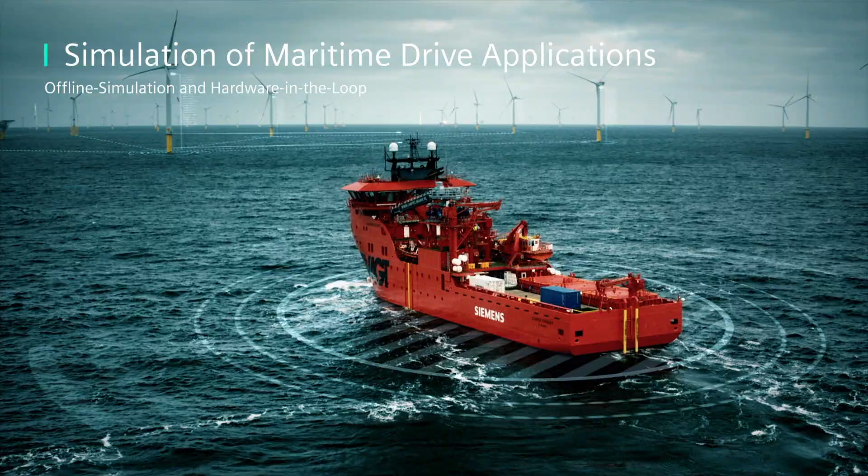What is the course of the maritime industry? The disruptive trend of green shipping is offering tremendous opportunities for electrification of the maritime drivetrain. On the other hand, this promising trend is leading to an increase of system complexity and more demanding technical requirements. THD levels in weak grids are just one of the various examples to be mentioned. On top, there are general project topics like cost pressure and tough timelines. For OEMs and system integrators, handling this increasing complexity will be a key factor for maintaining their business success.

A game changer for doing so is simulation. I wanted to introduce you to the offerings of Siemens Motion Control for simulation and virtual commissioning of complex drive systems, as addition to our comprehensive product portfolio.

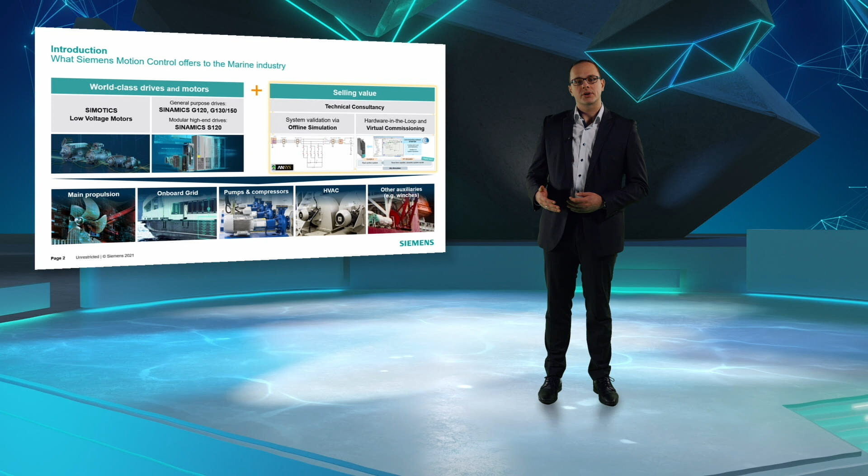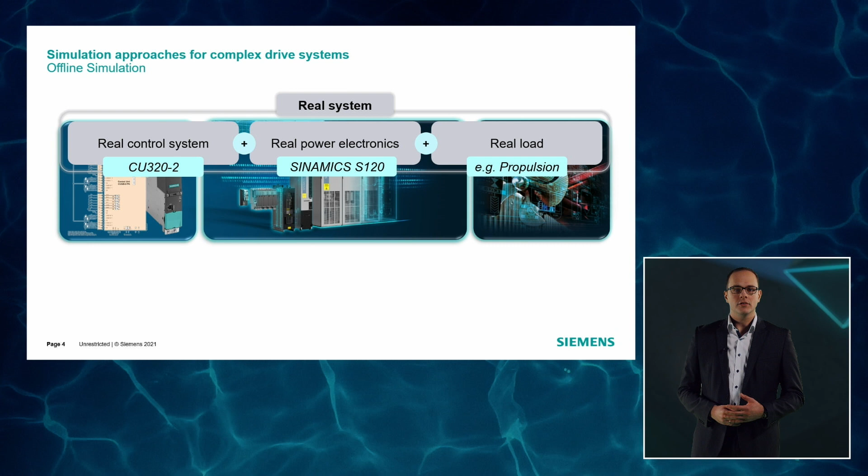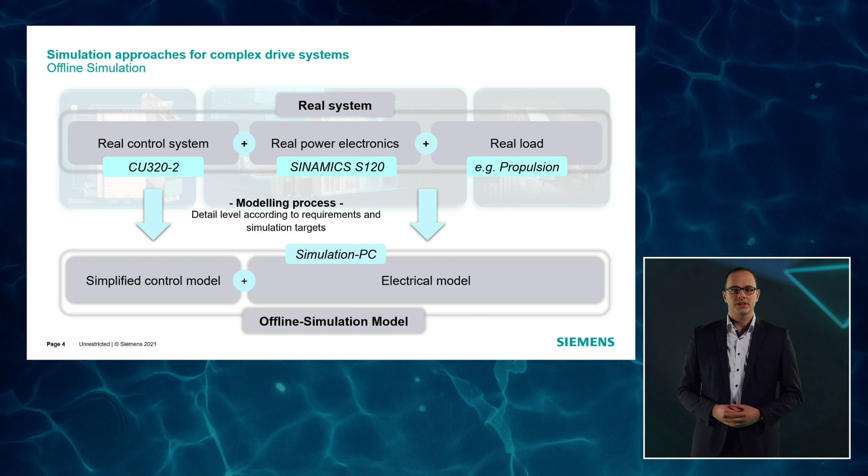Let's go on board. The core of any simulation approach is the comprehensive understanding of the real drive system. Generally, we divide this into the control system, the power electronics, and the load, for example, the electromechanical propulsion system. For offline simulation, the real system will be converted into a simplified control and an electrical model. The detail level of this process will be chosen according to project requirements and the simulation target.

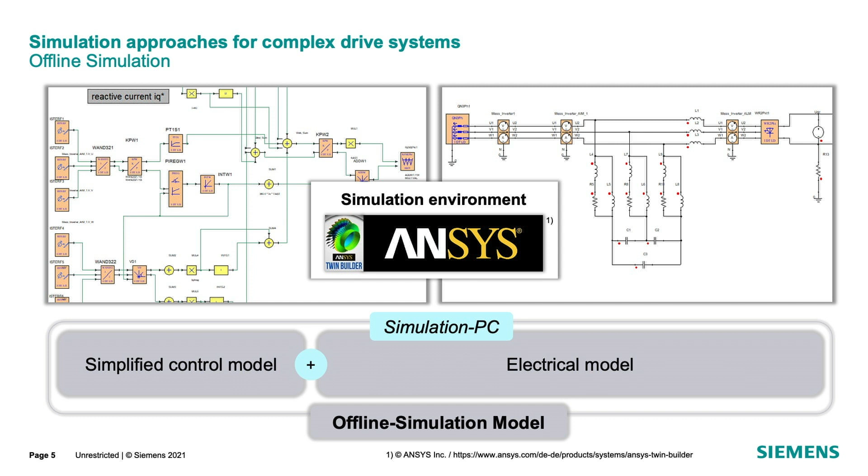These models will be implemented in ANSYS Twin Builder, a powerful simulation environment for various use cases. Just to mention a few, this offline simulation approach can be utilized for grid analysis like investigation of THD levels for class approval, proof of system stability, and short-circuit investigation of distributed DC systems based on the geometry of DC bus bars and fuse characteristics.

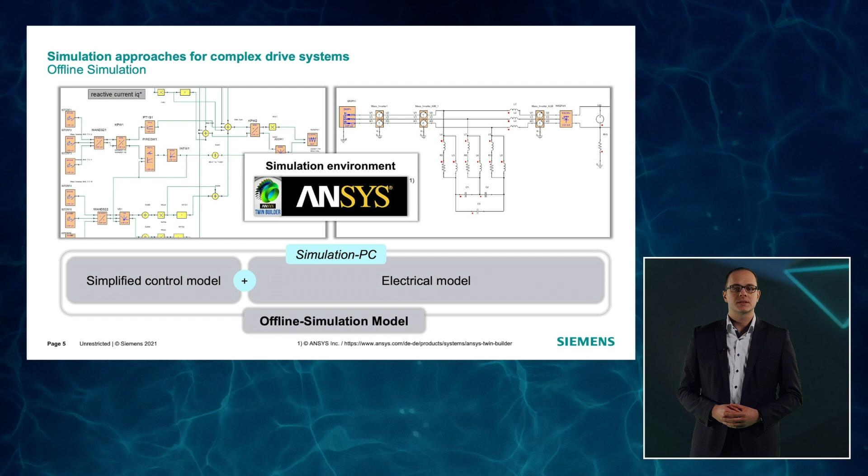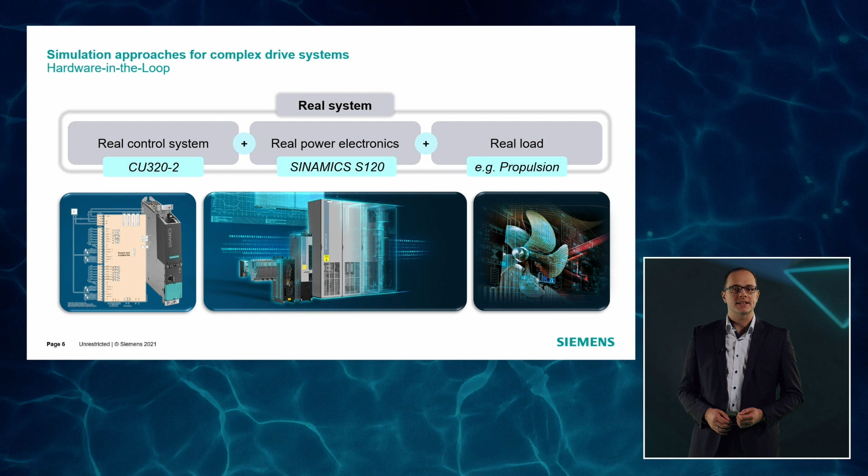At the beginning, I was talking about challenging project requirements like cost and time pressure. Furthermore, risk minimization is one of the most crucial topics for successful project business. Next, I want to show you how our hardware-in-the-loop simulation and virtual commissioning contribute to cost and time savings as well as risk minimization. Again, the starting point is the real system and the modeling process.

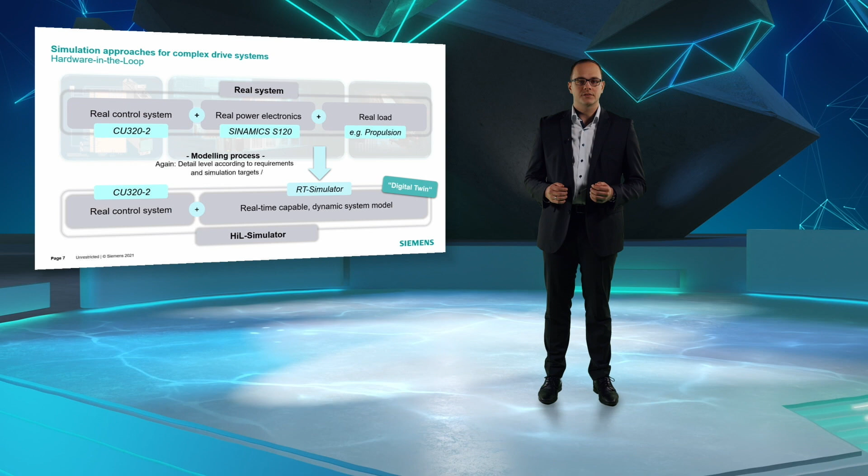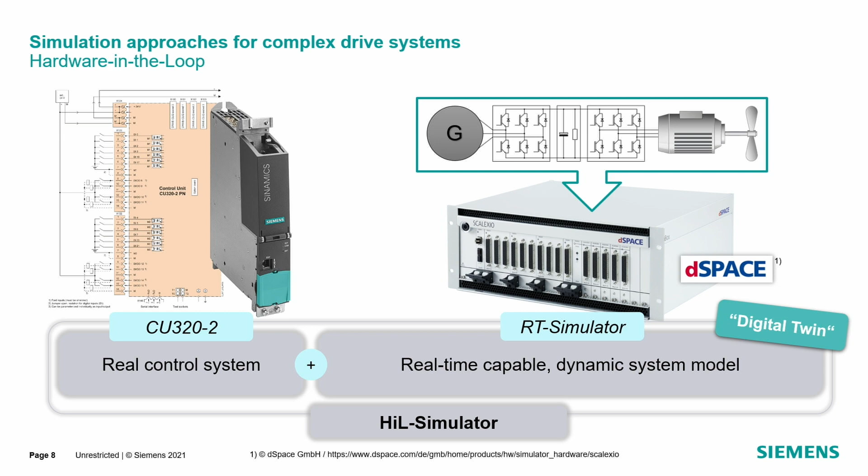This time, a dynamic system model will be implemented on a real-time simulator. This real-time capable model will be the representative of the real system's behavior, the digital twin of the drivetrain. The drive control will not be modeled. Instead, our control unit CU320-2 will be connected to the real-time simulator. This setup is the fundamental for virtual commissioning. It allows us to treat the drive control just like in the real system.

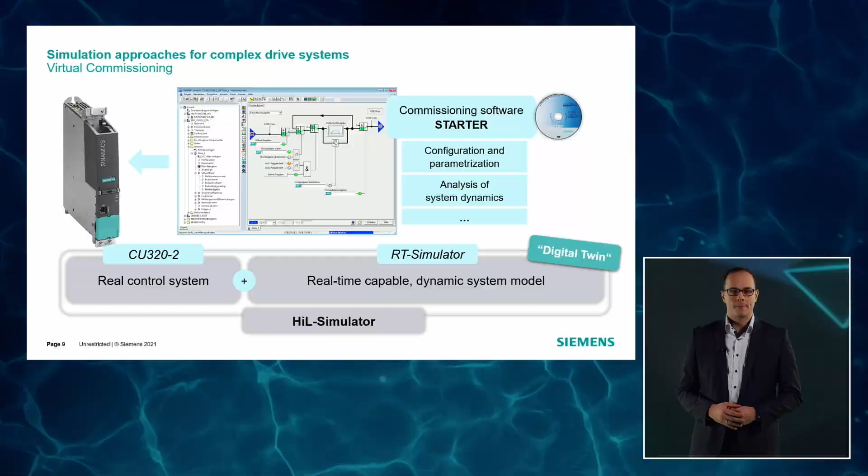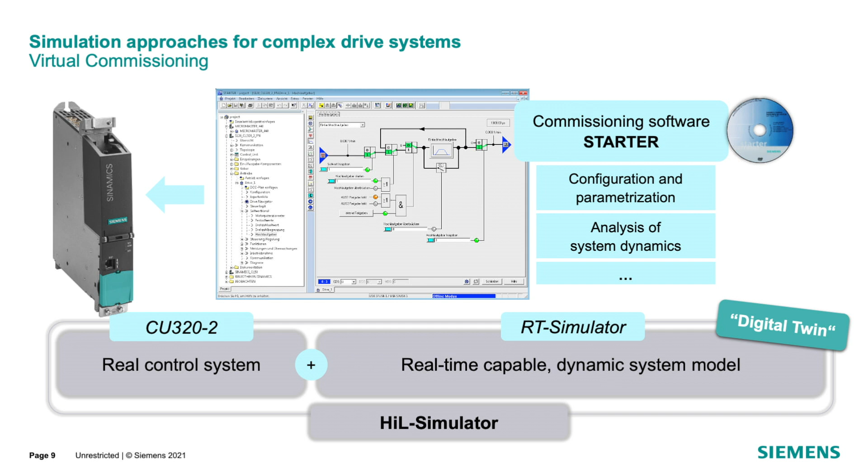With our standard commissioning software, SINAMICS Starter or Start Drive, we can perform all relevant steps of commissioning, like configuration and parameterization of the drives, analysis of the system dynamics, or training of commissioning staff. And all of this even before the installation on the vessel has started. In the end, resulting configurations and parameter sets can be quickly implemented to the real system. Plug and play. Thereby, the virtual commissioning is not limited to the drive control.

In our simulation laboratory, the whole automation system can be connected to the HIL Simulator. Our customers can integrate the plant automation system based on PLC and IPC, as well as their customer-specific HMI that allows testing of the whole power management system.

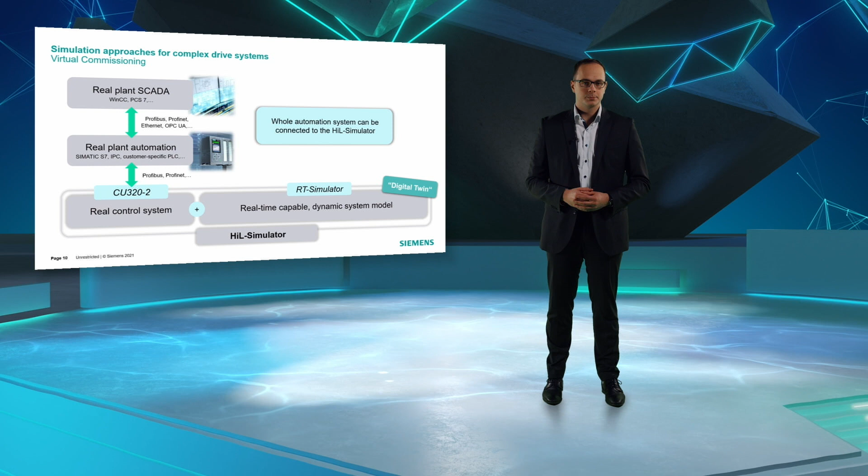Let's have a more detailed look at the architecture of the HIL Simulator. In the laboratory, the exact setup of the real control system will be implemented with the original hardware. Besides, the already mentioned customer-specific automation and the drive control unit, as well as additional peripheral components like voltage sensing modules and terminal modules, will be added. The heart of every model drive will be its original Control Interface Module, CIM, with original Intelligent Power Description Data, IPD. All of these components will communicate via the original DRIVE-CLiQ protocol for SINAMICS drives.

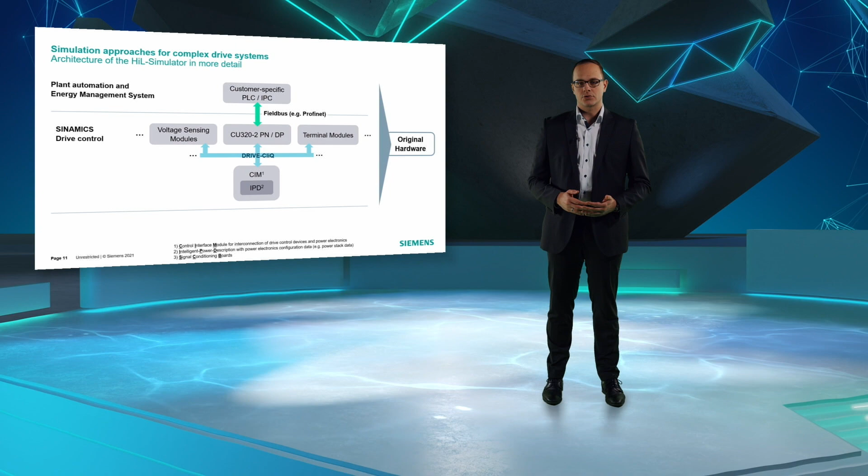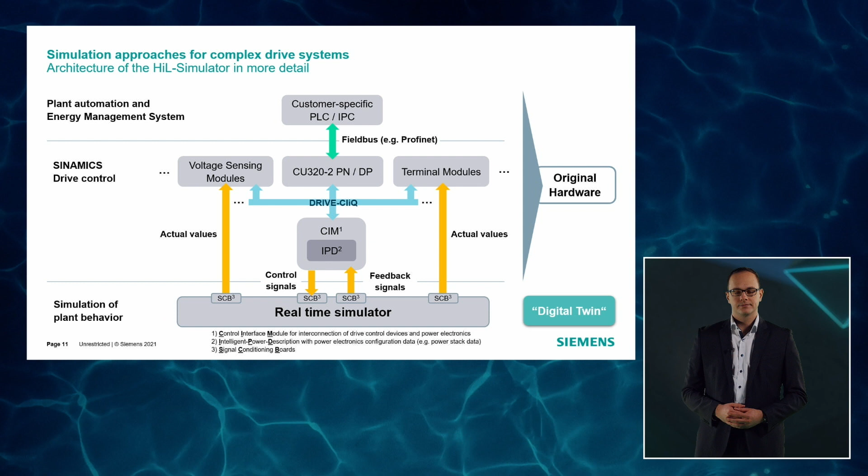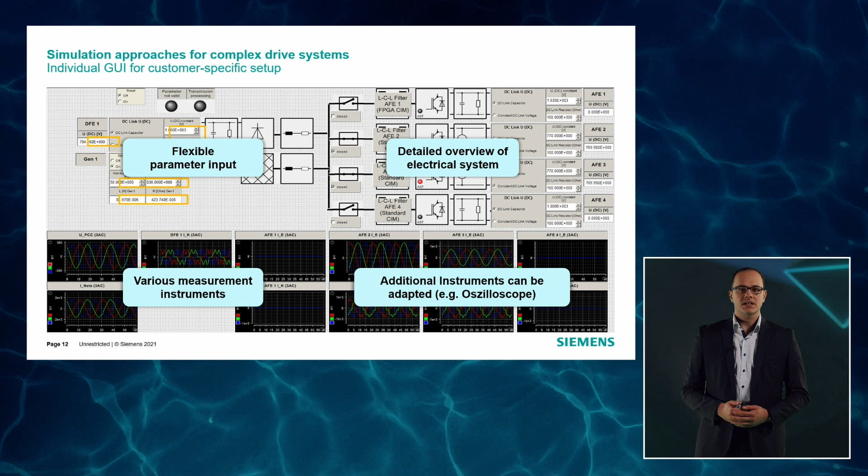Signal conditioning boards will be the interface between the original hardware setup and the real-time simulator. These boards will convert the physical feedback and controls to digital signals for the simulator. For user interaction with the simulation model, an individual graphical user interface will be provided. It allows flexible parameter input for changing electrical characteristics of the model. Furthermore, various measurement tools are available. For detailed investigation, even external instruments like oscilloscopes can be adapted.

The advantages of these simulation approaches are obvious. They allow a proof of concept, conceptual failures can be found in the early project phase, and detailed analysis of the digital twin is more effective and can be done in parallel to planning and engineering steps. Especially in case of new developments, our simulation offerings will significantly contribute to risk minimization and the success of your maritime projects. I would like to invite you to come on board and enjoy our simulation and technology expertise.